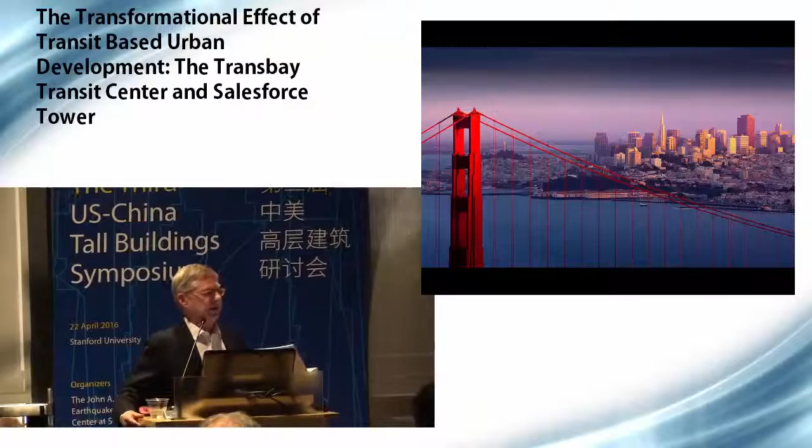I'm not going to talk so much about the Salesforce Tower today because there are several other speakers who are better prepared to go into detail of what it means to do a tall building. I'm also appreciative of how John Zhang organized this, beginning with the largest pictures and eventually focusing on the components that make a city. My talk won't be a great deal of detail, and I'm going to go really fast through the transit center itself, with mention of the Salesforce Tower. There's a lot to talk about.

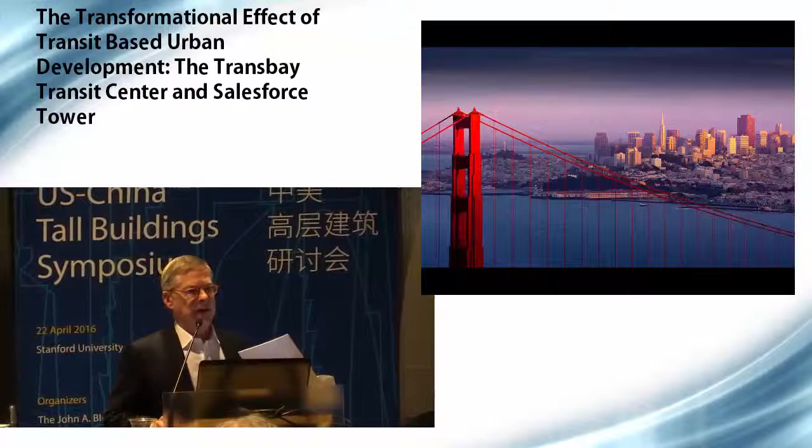Let me start with this particular slide. I believe strongly that there is an emerging, entirely new attitude toward tall buildings—much less about traditional assumptions of context and regionalism, much more about people and aspirations. This has broadened the assignment for those of us who design tall buildings; we're now obligated to include not just architecture, but urban design, engineering, the environment, culture, and lifestyle. I tried to think about how one might apply some rules for doing skyscrapers, not just in the United States but around the world, and how those rules might be universally applicable.

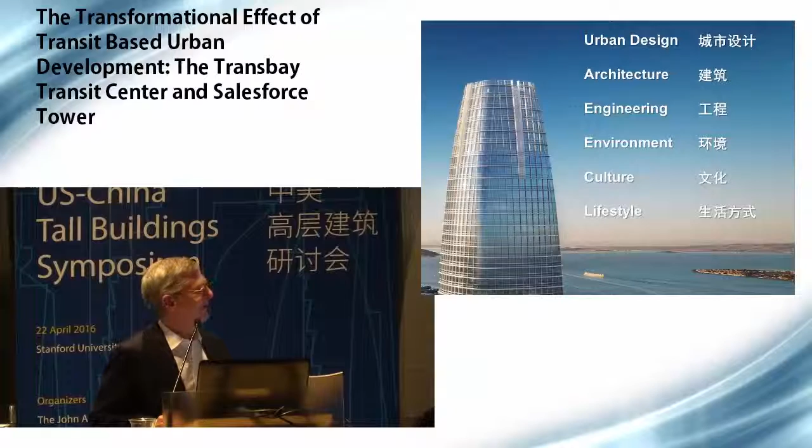Now, obviously this is my list. It would be wonderful to have this list argued against, expanded, or even eliminated, but this is where we're coming from—this is where Pelli Clarke Pelli is coming from, both in the Salesforce Tower and, frankly, in the transit center itself. John did a superb job setting the stage, so I'm not going to go into any real detail.

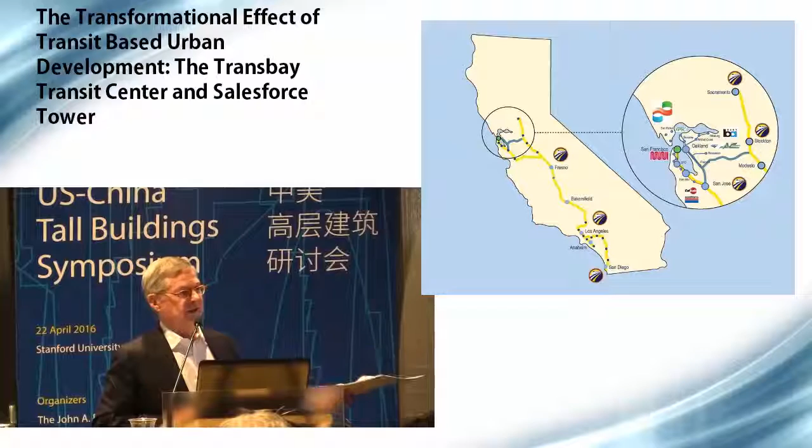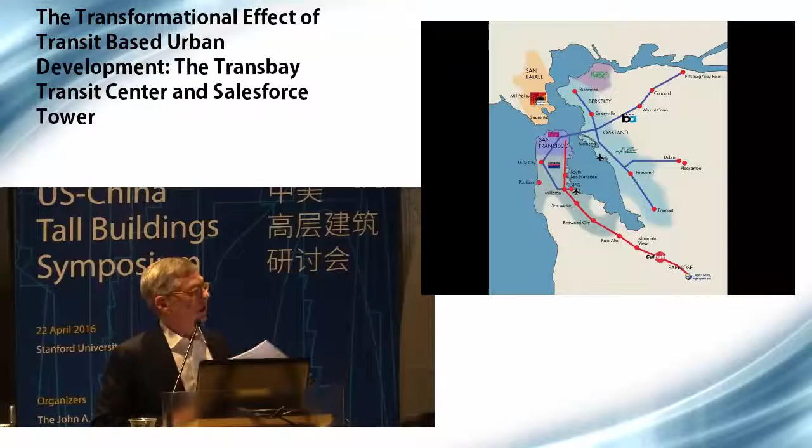Clearly, as you can see on the left, the ultimate objective is to connect the entire state of California from north to south via the California high-speed rail. The immediate objective of the transit center is to connect some 13 systems of buses, hopefully eventually Caltrain. The transit center itself is placed and designed to be the Grand Central Station of the west, meaning it's not only a functioning building but one of great symbolic importance. Those are the underlying objectives of what we did.

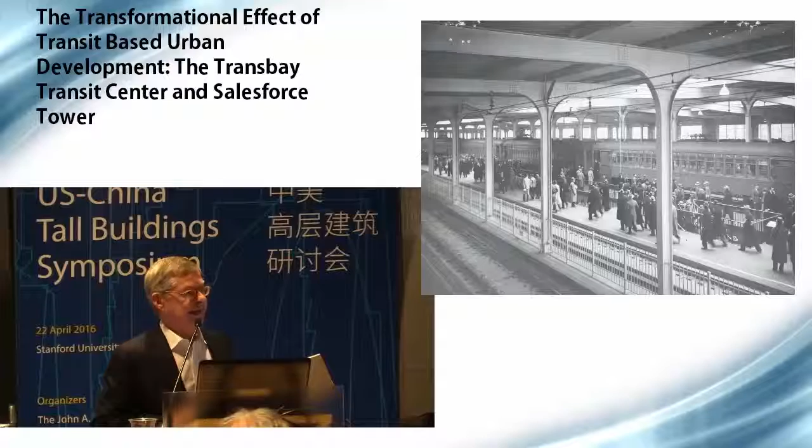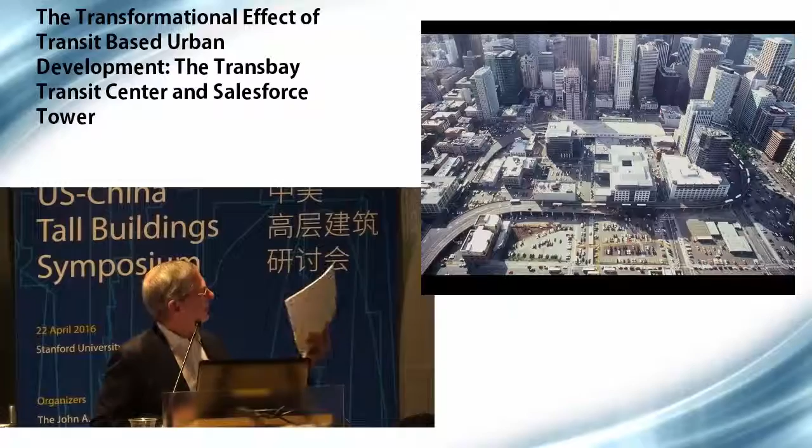The transit center has a long history. There was an interesting 1930s building before us, which in its prime was probably good, but eventually became, like many such buildings, unsafe, poorly maintained, and inappropriate for the times. What it did have was a very big footprint—around 5 acres—in the middle of one of the most important and hottest real estate markets, perhaps in the world right now. That footprint included several large ramps from the Bay Bridge that took buses through the city streets. So when you take down not only the transit center but the ramps, you unearth an enormous amount of buildable area.

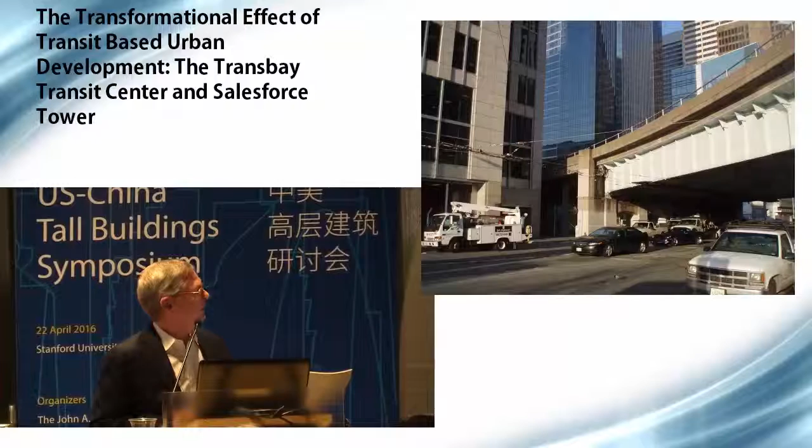This is an interesting slide—this is Beale Street as it was only about 10 years ago. If you walk on Beale Street today, you'll realize it's an entirely new and much better environment. This shows how critical those old bus ramps were to one's impressions of the city. Underneath that bus ramp today are some very important and valuable pieces of real estate.

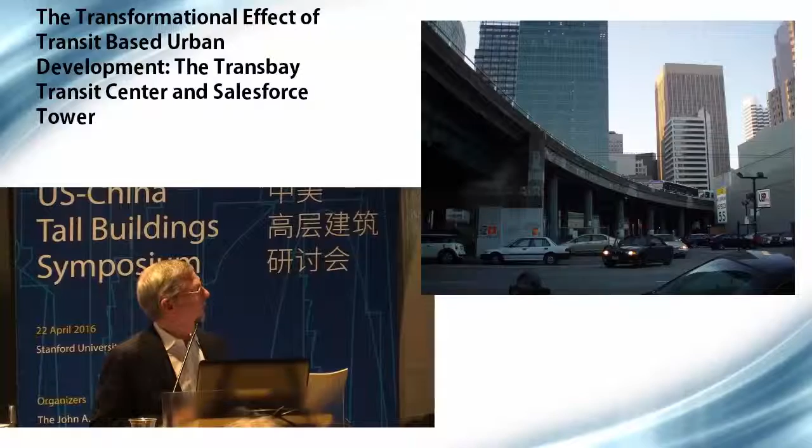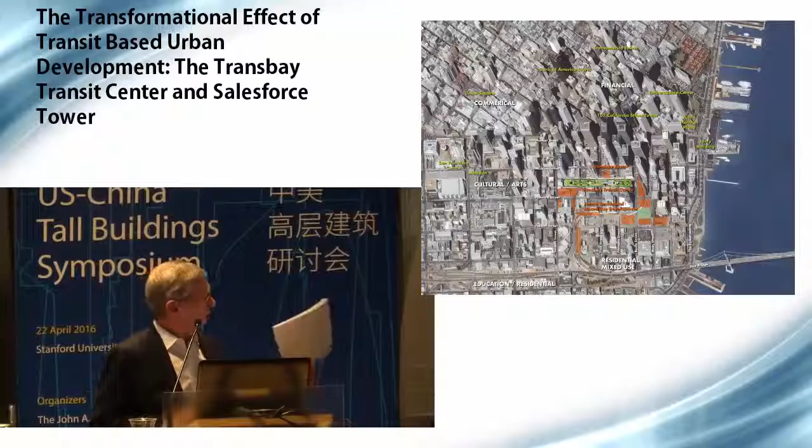The transit center is in the middle of one of the most important and varied parts of San Francisco's urban map. It happens to be at a confluence of cultural, arts, finance, recreation, and in the future, housing. This was a competition we entered and won some 8 years ago, and we realized this was the beginning of a new development—a new neighborhood of San Francisco.

Along with Peter Walker, our landscape architect, we did a great deal of research about the history of development in San Francisco, and there's a really interesting fact—I think San Franciscans are unique in this regard. In many instances, parks actually preceded development. A park was built first, and then buildings and communities were built around those parks.

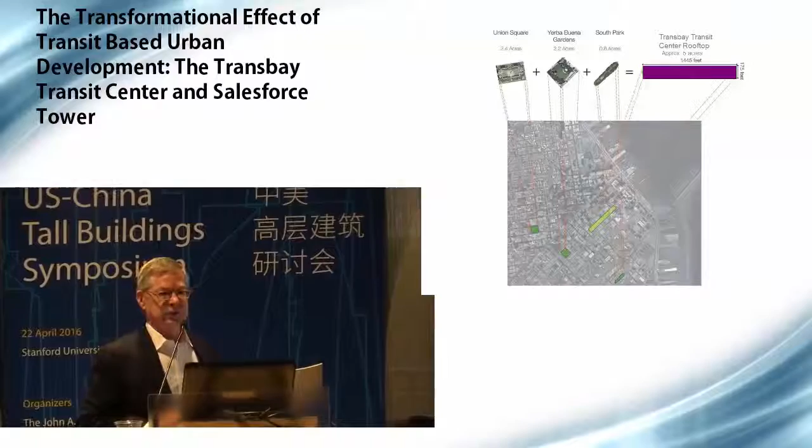We realized that the roof of the new transit center, a 5-acre roof, was going to be essentially the 5th facade of this building, since surrounding towers were most likely going to look down on this roof, and they had to be able to see something. Our attitude and approach was to make that an urban amenity, and thus was born the notion of a 5.5-acre, fully accessible, fully usable urban park.

Obviously this goes well beyond just the notion of the green roof. For the architects in the room, in the middle of the competition, we did a quick analysis to see if this was more or less expensive than a fancy glass roof, like one sees in transit centers. It turned out this park, on a per square foot basis, is half the price of doing a fancy glass roof. And of course you can't occupy a fancy glass roof. You can look down on it, it's probably handsome, but it's expensive and it's really not a public gesture ultimately.

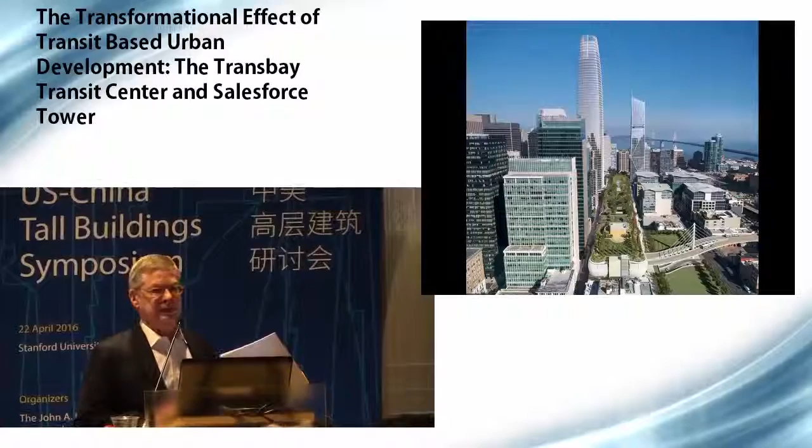We also went to a lot of pain and analysis to see how this building might be the very best neighbor it could be at the street level, and to its adjacent, as yet unpredictable buildings.

So we spent a good bit of time on the skin of the building. As many of you know, if anybody's been to the Port Authority bus terminal in Manhattan, bus stations and transit centers are usually really terrible neighbors. They actually kill development rather than create it, and we wanted to absolutely reverse that trend. Now New York is thinking in these terms—we're now involved in the analysis of the Port Authority bus terminal in New York, and Transbay has become the model for that kind of development there and in other cities where we've given this talk.

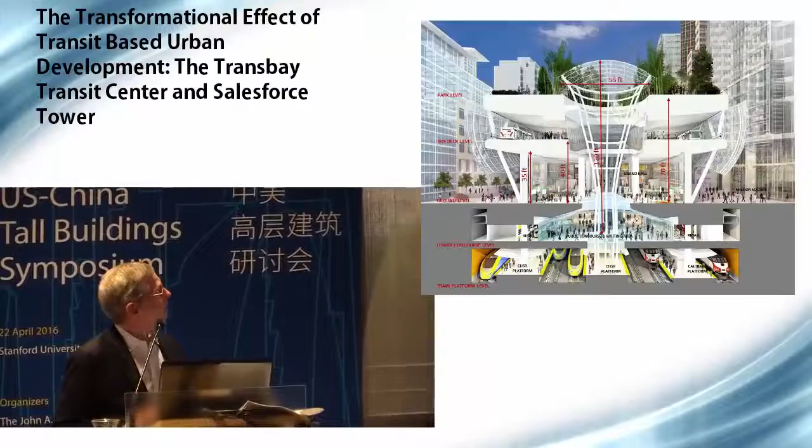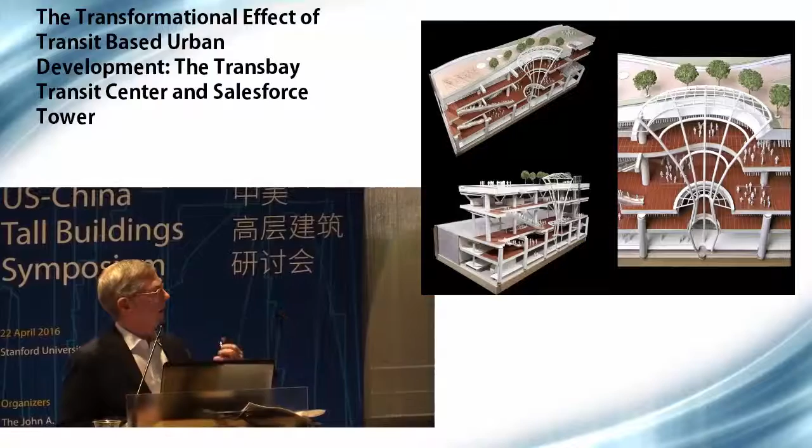This was a building that was enormously studied, both in traditional three-dimensional ways and more contemporary ones. But ultimately, as big as it is, the architecture boils down to three essential ingredients: the park, the large public space I'll show you in a few minutes, and the skin that wraps the entire building. Otherwise, this is a giant feat of engineering. I make that point because, once again, this building is an example of the confluence of architecture, culture, and engineering in a very interesting way.

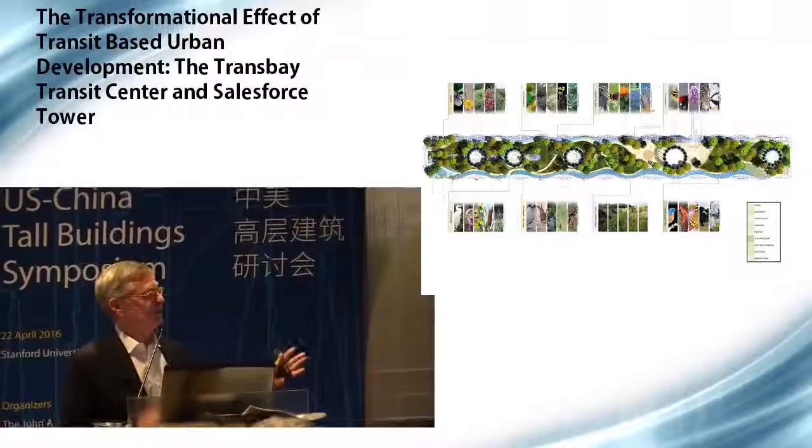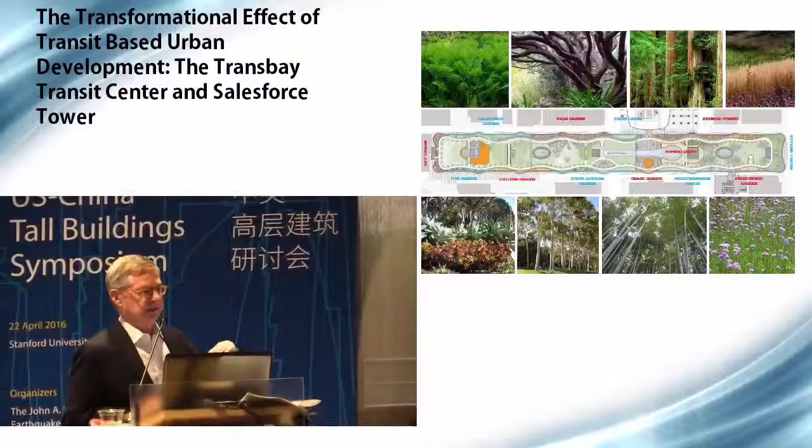The park itself is highly varied, with many sub-environments within it. I won't go into a lot of detail, but suffice it to say you'll be able to visit this park every day of the week and see something new.

The building is also highly sustainable. We decided early on that simply being a LEED rated building—although we are LEED Gold—was really not enough of a statement, not enough of an aspiration for our project.

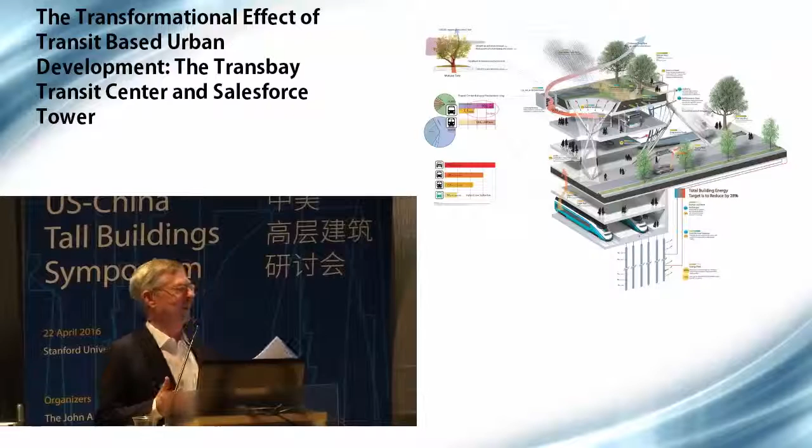With the park, we've introduced a whole new set of things we were able to achieve. Let me rattle off some statistics. Beneath the entire building is the largest geothermal installation in the United States, perhaps one of the largest in the world. The geothermal installation alone has allowed us to completely eliminate cooling towers. If anybody knows what a cooling tower looks like, you know you really don't want to look down on one from your apartment next to the transit center.

The water management system within the building, which is really the core idea behind the park, allows us to manage 10 million gallons of water a year. Rainwater management in San Francisco is a huge thing.

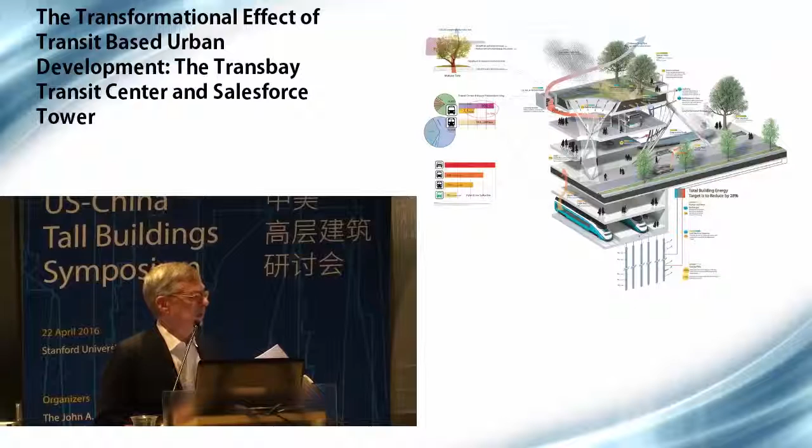10 million gallons of water, or 144 Olympic-sized swimming pools, is what we're taking care of every single year. The trees in the park will capture 12 tons of carbon. It's a huge carbon sink.

It's the place that you really want to have in the middle of a high-density, very active transit-based development. The carbon emissions control in this building is such that, in many ways, it's as if you're planting 2 new acres of trees every single year the building is in existence. So the building is designed to give back to the environment, not just to manage it, but to give back in some extraordinary ways.

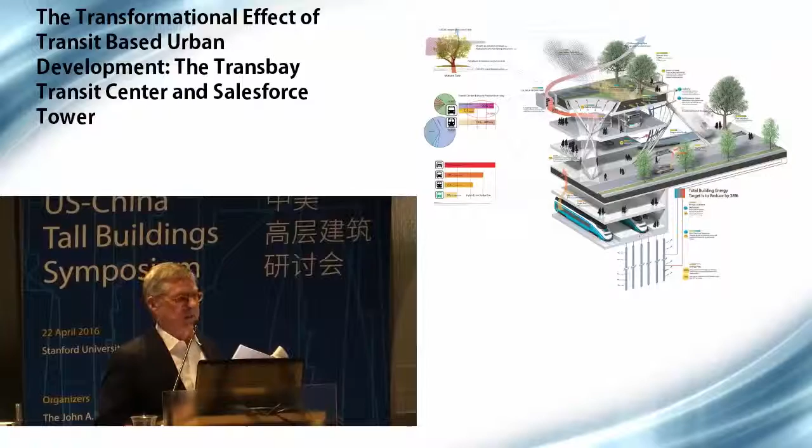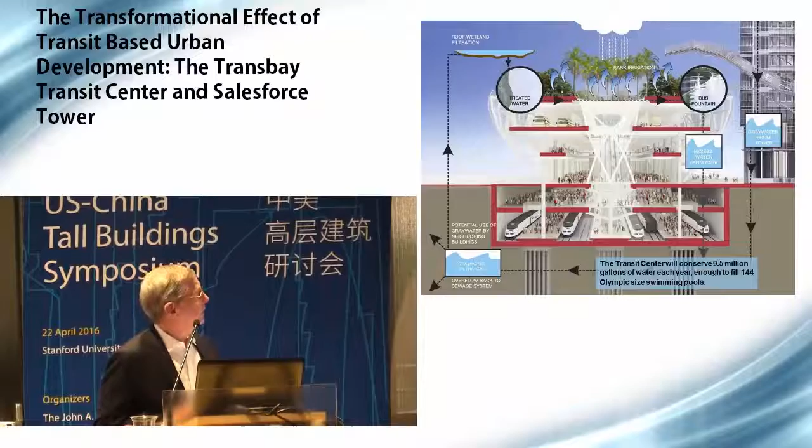It's naturally ventilated. As I said earlier, the water management system and energy management system alone are very, very critical. I'll quickly go through the plans.

The intention, which ties into some of the things John said earlier, is that this building touches the ground very lightly. It's highly permeable, so you're able to drive and walk all through it, with safe transits under the building. Every street, every alley, such as Shaw Alley, will go through the building.

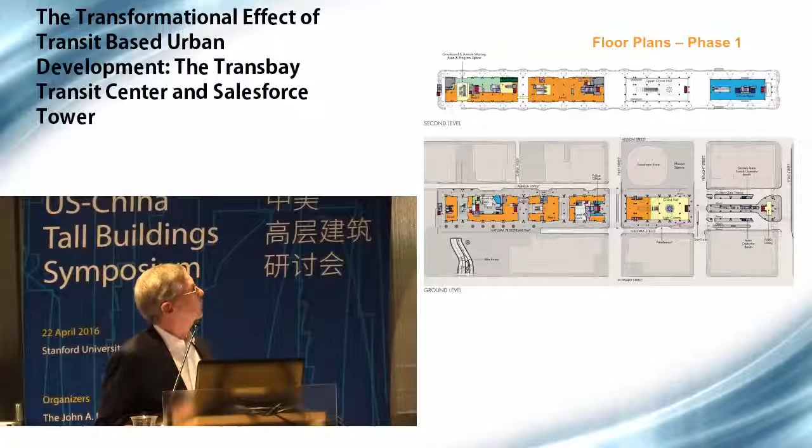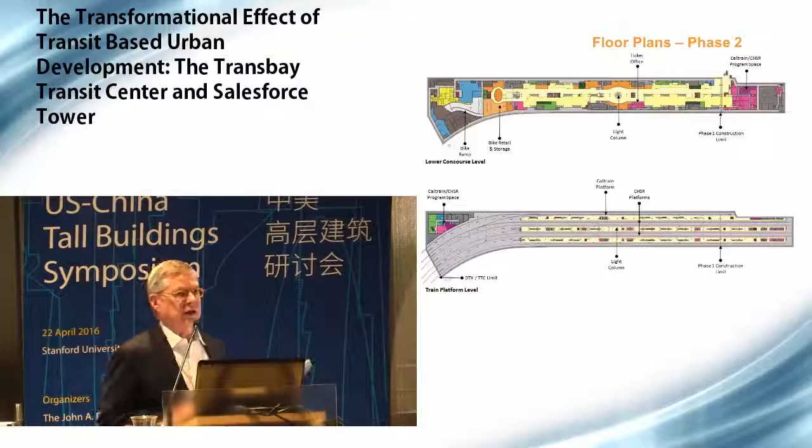The lower level, the retail level at the street, is highly programmed with local retail opportunities. There's a second floor of retail, the park on the very top, and the bus deck just below the park. As you go below grade, the top drawing is the concourse level where you wait for your trains, and beneath that is the train deck itself.

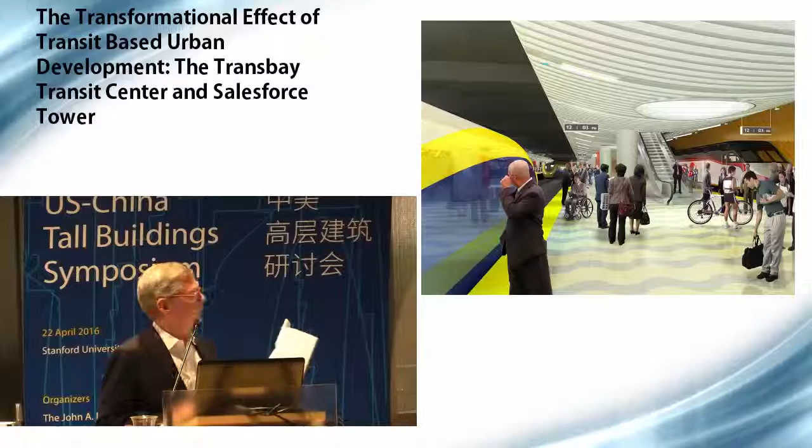This is phase 2. This is the concourse level where you wait for trains, and the trains below that. We've managed to bring natural light all the way through the building from the park down into the train level. Let's see if this works.

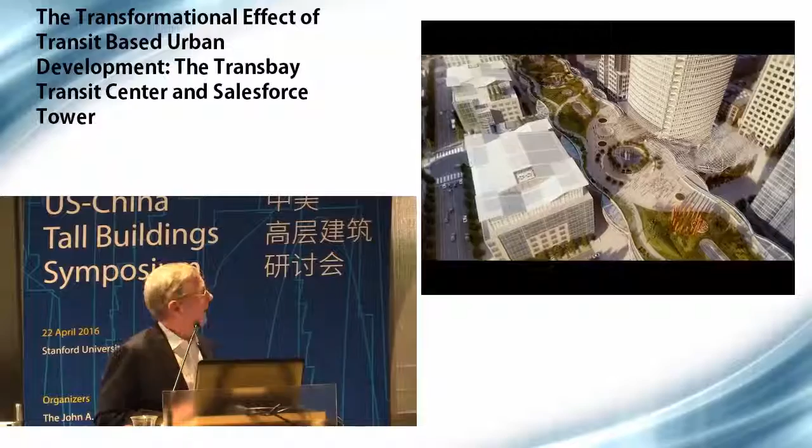This is one of the best ways to understand it. This is an older animation, slightly out of date, but it will give you a sense of the scope and attitude toward the development.

As you can see, this whole notion of a fifth facade becomes really critical because every new building is going to look down onto the park.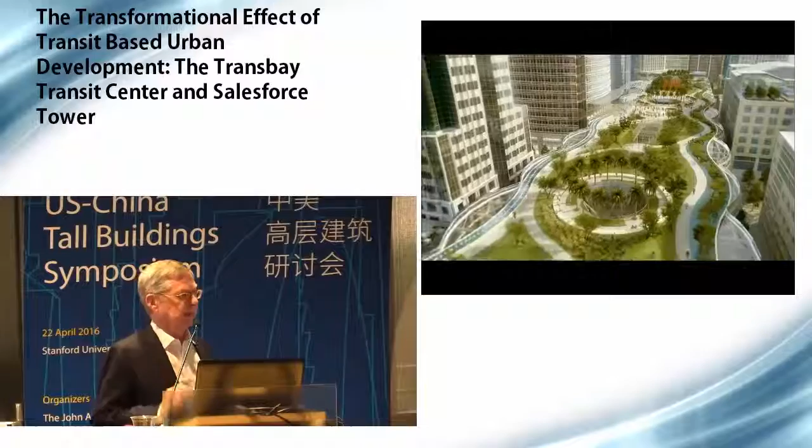Peter Walker has been a superb partner in all of this. He's designed a really amazing place, full of experiences and details. The park itself is considered a kind of educational opportunity as well. If you want to learn about landscape, this is one of the best laboratories for dealing with everything from wetlands to desert climates. Peter has had a way of weaving all of those attitudes together.

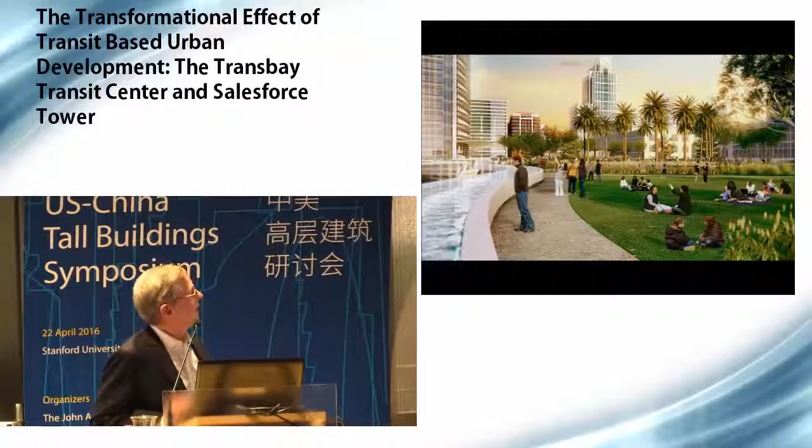The park itself is also a place for art. The fountain you just saw is operated by bus movement.

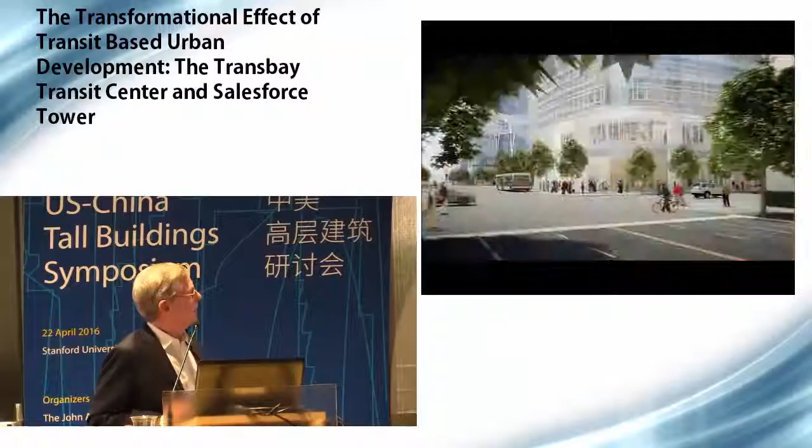At the street level, again, very transparent, friendly, and open. This is on Mission Street. You see the Salesforce Tower on the right. Salesforce Tower itself also meets the ground in a very light, transparent, and open way.

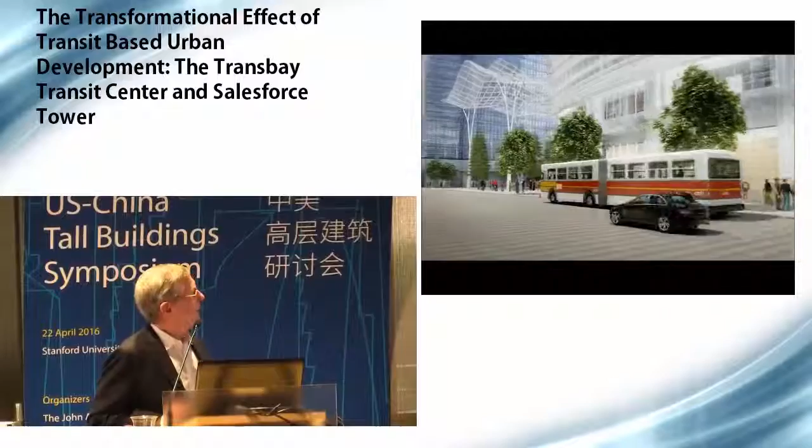During the days of the competition, we had a roof over what we're calling Mission Square, a large open space that fronts onto Mission. That roof has disappeared. The grove of redwoods, I think, is still there, although it's being discussed with Salesforce.

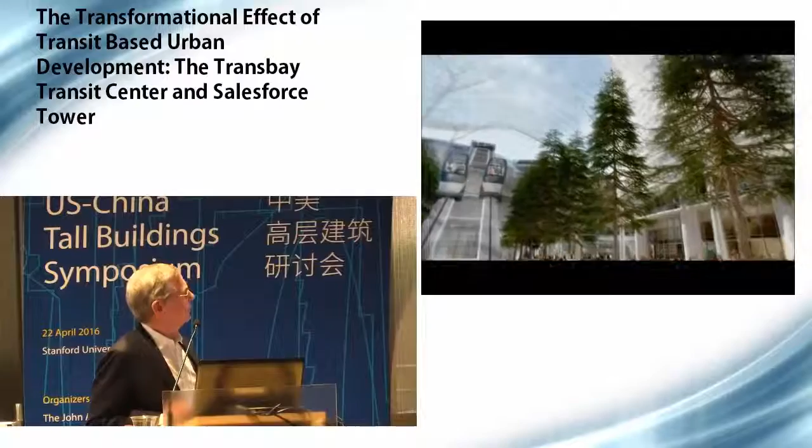Within that grove of redwoods is a funicular, which John mentioned, that will take you from Mission Square up to the park level itself, through the redwoods.

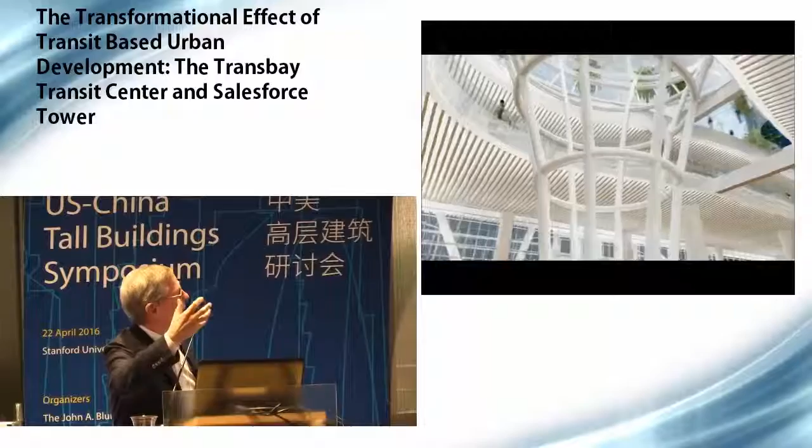Inside the building, this is what we're calling the Grand Hall. The centerpiece is a column of light that is both a structural device and a way of bringing light, literally daylight, from the park level all the way down into the concourse below.

At the bus level, if any of you remember the old transit center, it was dark and gloomy. This bus level is very bright, very open, very safe. Wayfinding is clear. Now you're down at the train level.

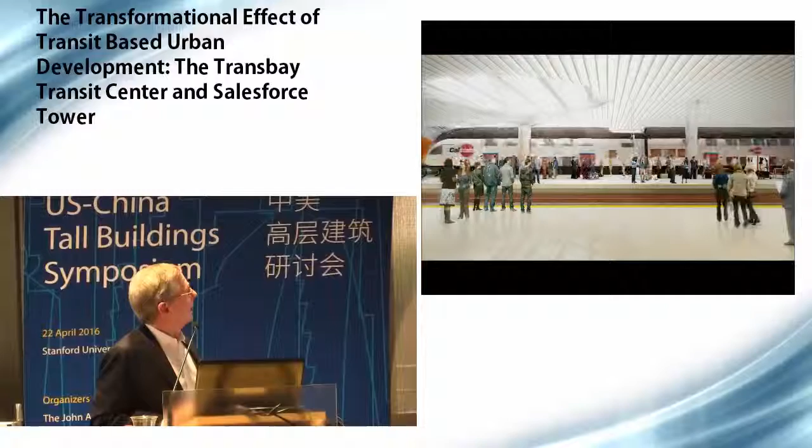Once again, we're bringing natural light deeply into the train level. It's roomy, very well organized, very clear, and very importantly, quite safe. A great place to meet your friends.

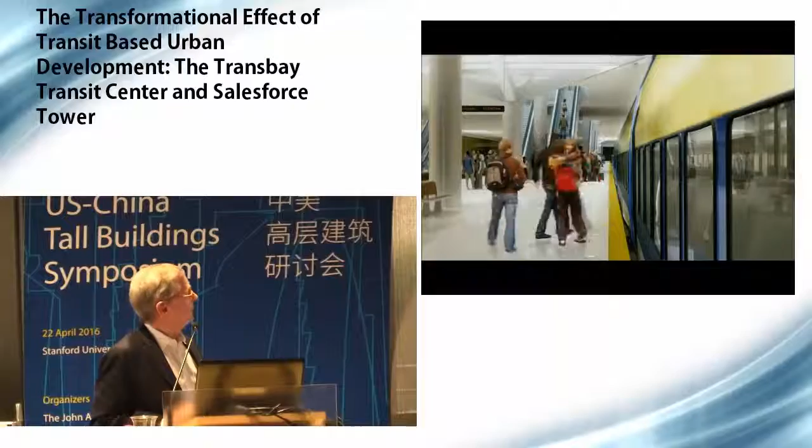I think they're friends, I'm not sure.

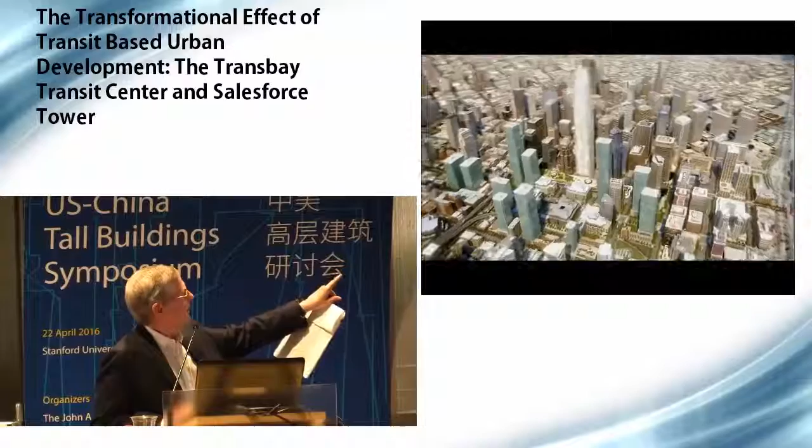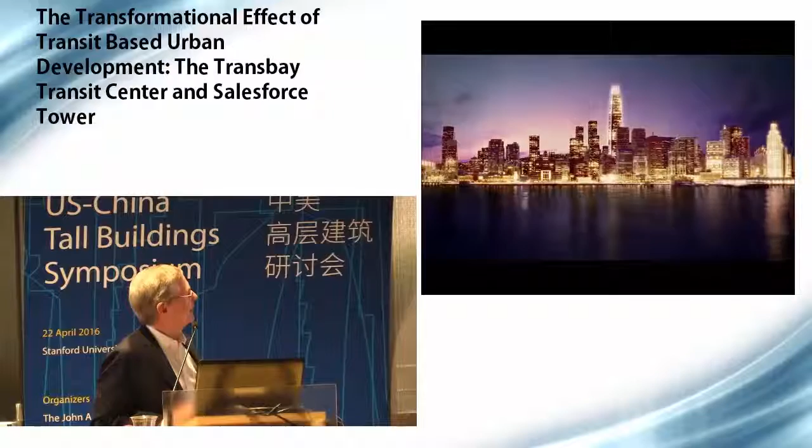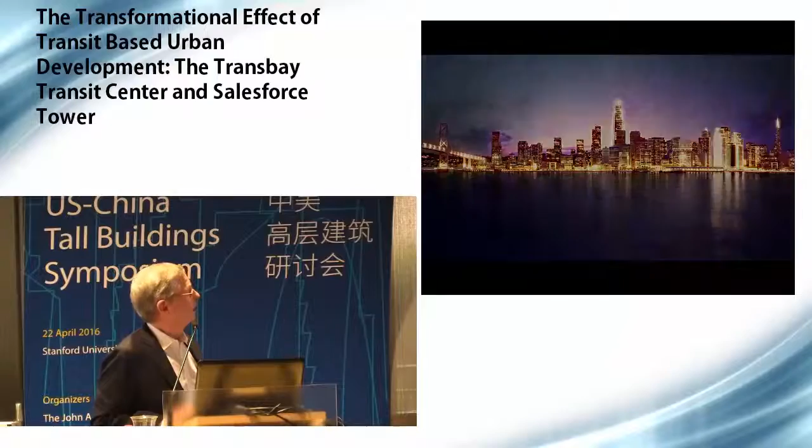This is an interesting slide because every one of the gray-green prismatic buildings you see there is a new development site made available by the removal of the ramps and the associated parts of the transit center. And of course, it all culminates in the Salesforce Tower. As John mentioned, the height of the Salesforce Tower is protected, and we hope it will be, for a very long time if not forever, the tallest building in town.

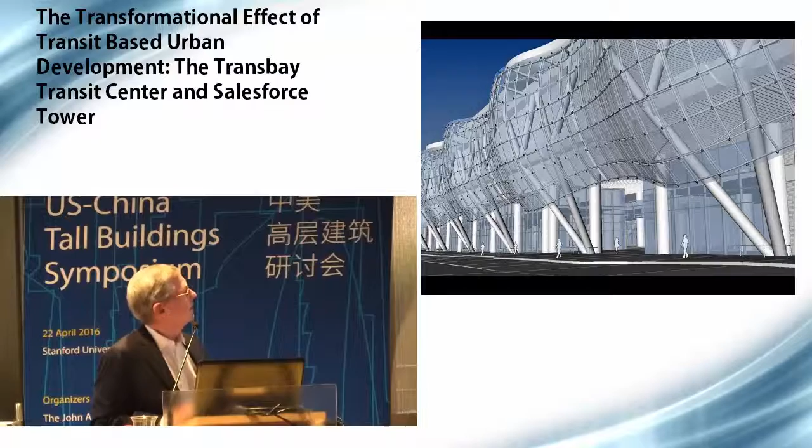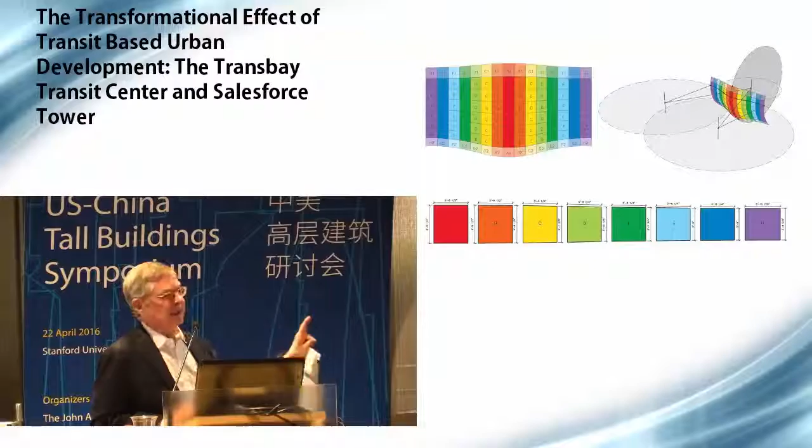The transit center is wrapped in a perforated metal skin, but underneath that metal skin is a complex bridge-like structure of primary and secondary structural elements that undulate and wave. They're curved both in plan and section. Being curved in plan and section means that every piece of cladding is actually a slightly different trapezoidal shape.

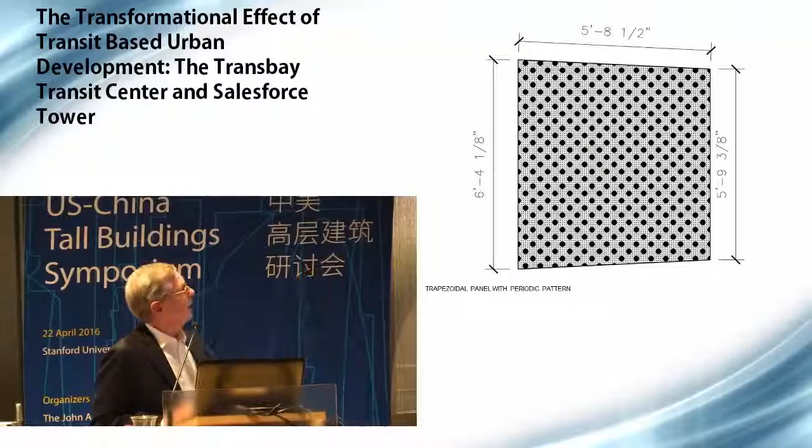This skin needed to be perforated also because we wanted it to be naturally ventilated. When you perforate a trapezoidal shape in a more normal way, you get very ragged edges. And we realized we needed another attitude about the perforation that was not just the more orthodox gridded kind of pattern. So we looked to a person who's now become a very good friend of ours.

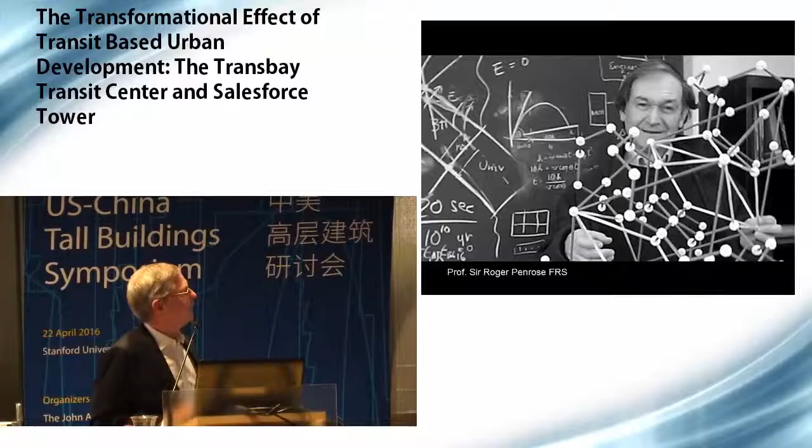The mathematical physicist Sir Roger Penrose. If anybody's seen The Theory of Everything, he's in there. He was Stephen Hawking's thesis advisor at Cambridge. One of Dr. Penrose's hobbies is what he calls creating tiling patterns. For a mathematician, a tiling pattern is simply a way to describe a surface, in this particular instance, in what he called an aperiodic way. This is a non-repeating pattern.

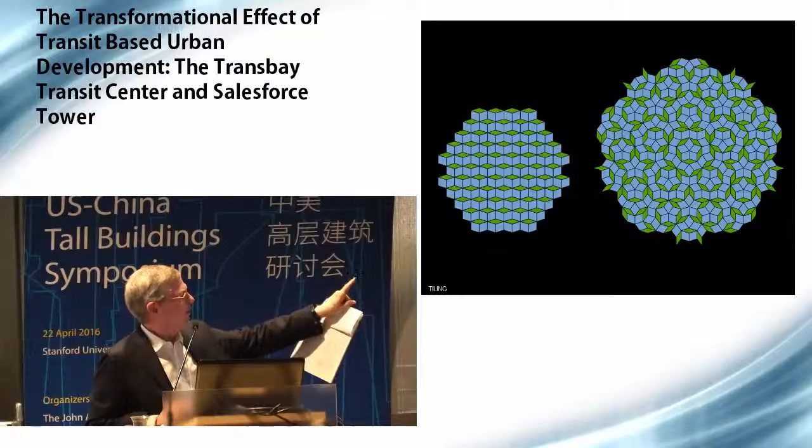The one we're using is the one on the right. It may look like there's a module to it, but there really is not. It looks like it's repeating, but if you look carefully, it's actually not. It's made of two rhombuses, a large one and a small one, which kind of flower and unfold across the pattern. The nice thing is that it was eventually discovered this is the atomic structure of aluminum, which is what our wall is made of.

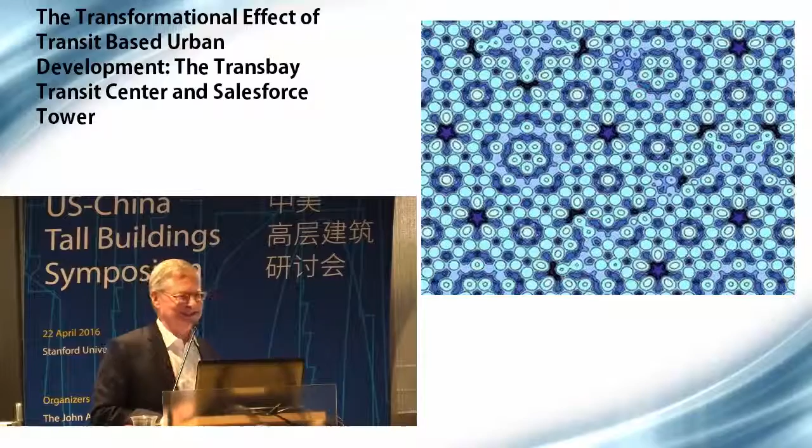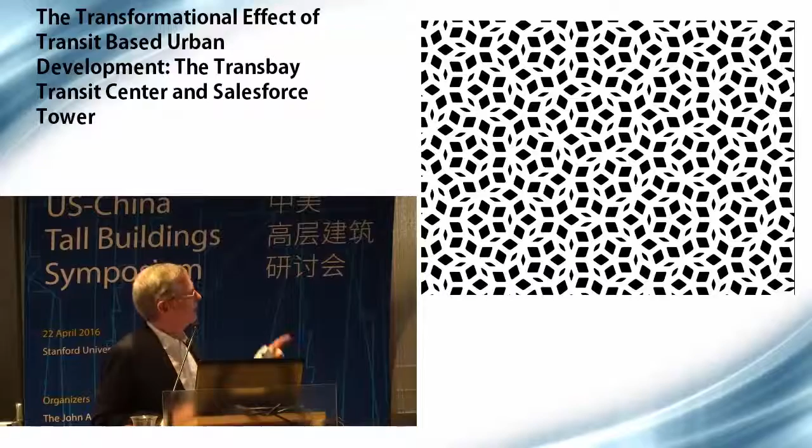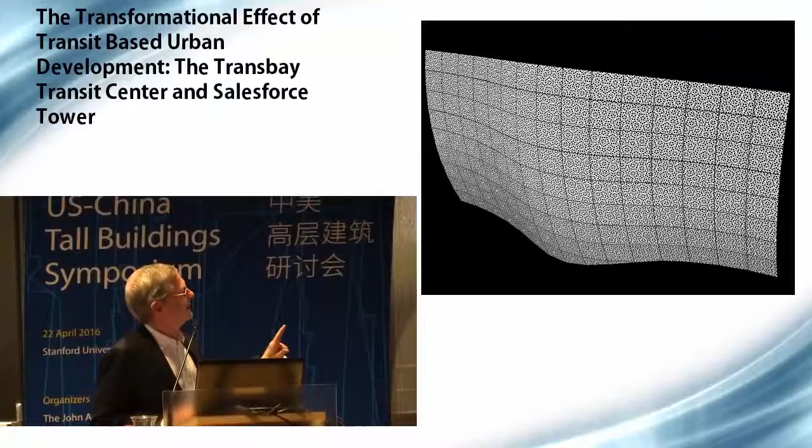Now, this is just pure coincidence, but it's great cocktail party stuff. If you apply Penrose's pattern to our trapezoidal shapes, all of a sudden your eye is led to the pattern and less so to the edges. And that pattern, after an enormous amount of brute force computer work, has now been stretched through the entire building seamlessly. The hardest thing to do was to get the pattern to jump the gap from panel to panel, and I promise you it does.

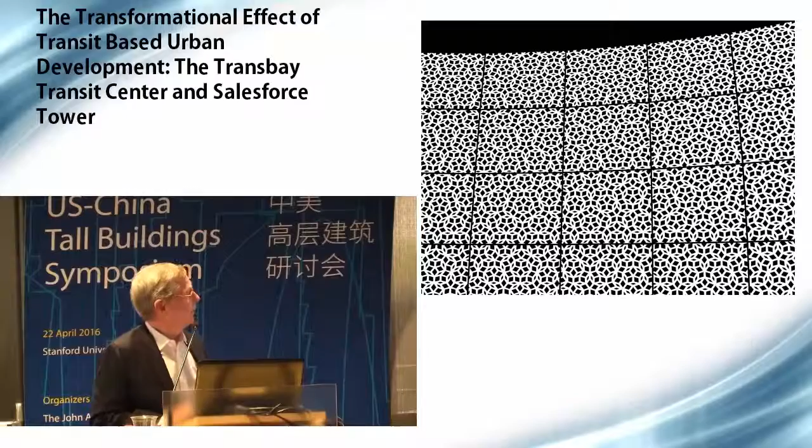Penrose and his wife, who's really vigilant about his ideas, have both looked at this many, many times. We've redone it many times, and finally he's approved it. And it's going to be quite spectacular.

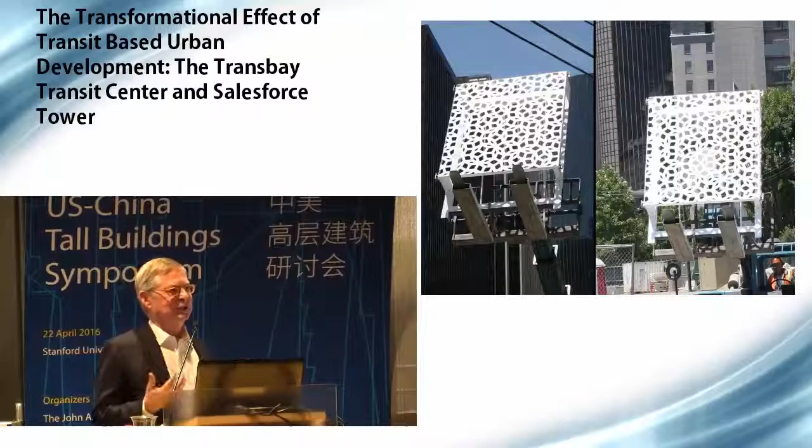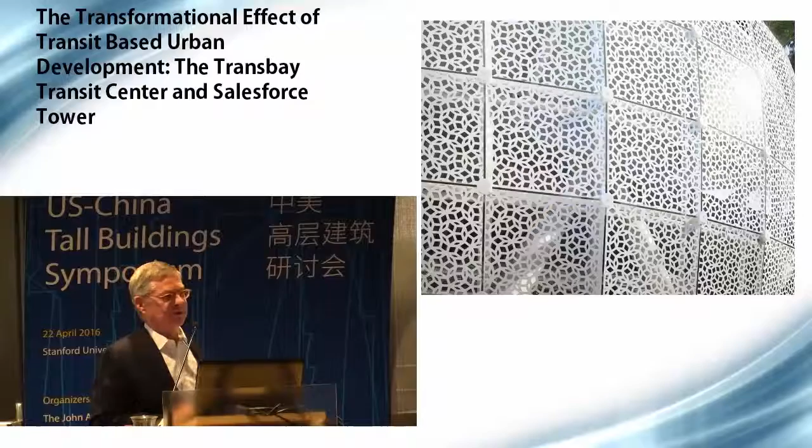The cool thing about this, in my mind, is that this is very much about the Bay Area, because this skin is itself symbolic of the confluence of art, culture, mathematics, and science. You can actually stand outside this building and talk about mathematics, or talk about the history of science. There are not very many skins on buildings that you're able to do that with. Plus, this light, lacy structure is really just extremely handsome.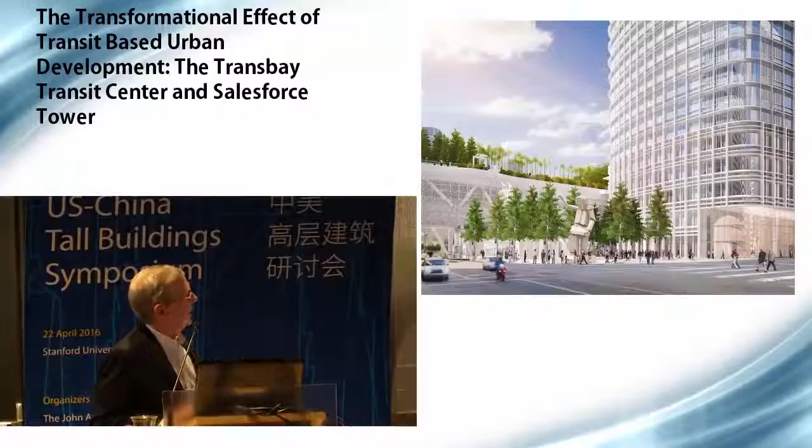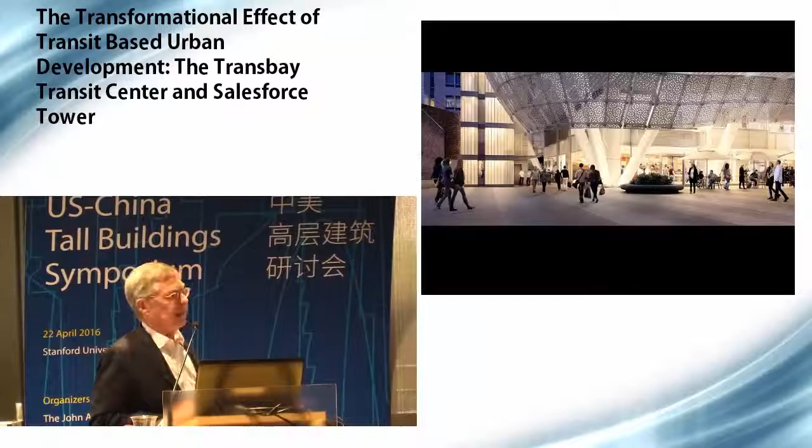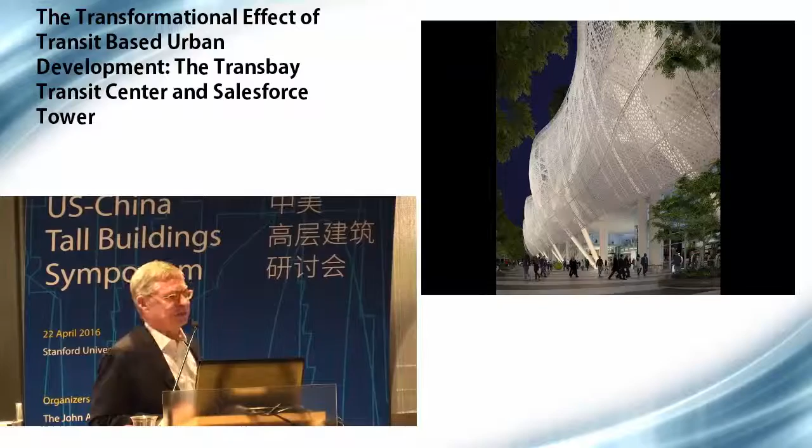Here you see it behind the Salesforce Tower, crossing First Street. It meets the ground very lightly, stopping about 20 feet above sidewalk level. In the evening, we're lighting the structure from behind so that the lace itself is in shadow, lending, we think, an extraordinarily sexy, dramatic image — if you could call a transit center sexy, I think then you've accomplished a lot. And it's now under construction.

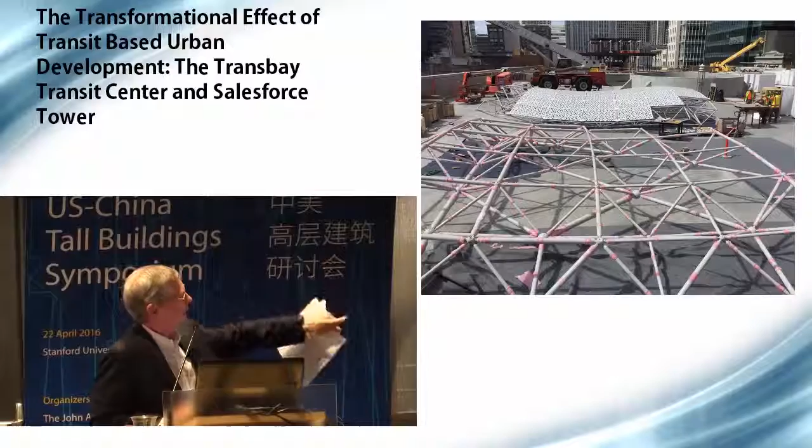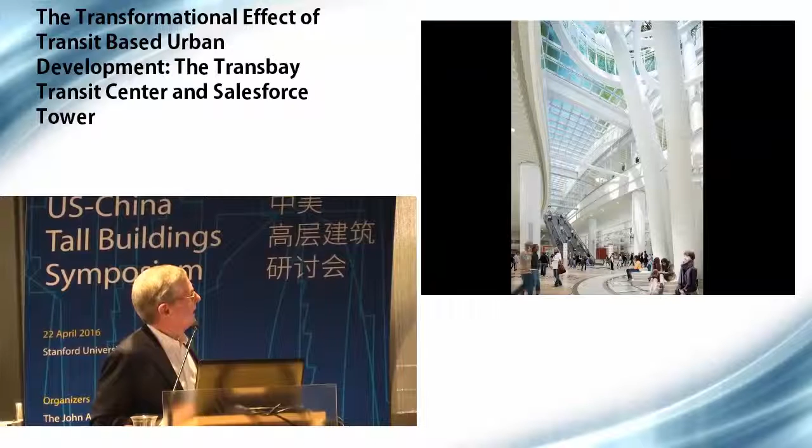This is the roof of the transit center where we're assembling the panels. The substructure, which is a space frame, gets the panels, and then they're lowered over the side of the building and bolted in place. Inside the building is the Grand Hall, a space that connects all the way from the street level to the park, very full of sunlight and full of public art.

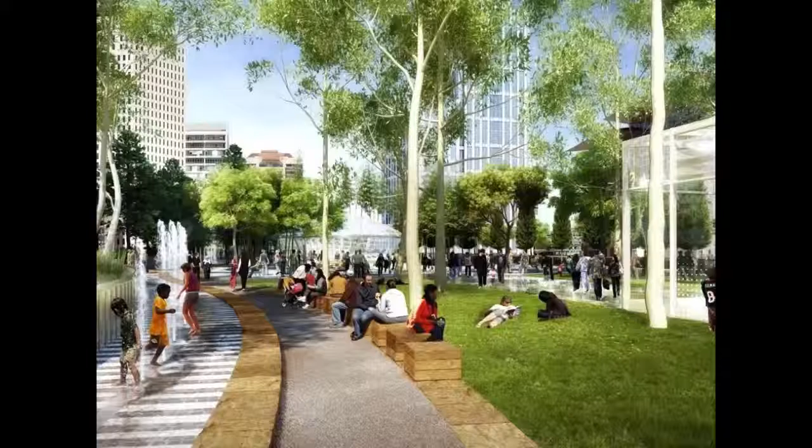And then the park itself, as I mentioned earlier, is very green. It's really a park, not just simply a green roof, with eating and entertainment opportunities. A fountain that runs almost the full length of the park is activated by the movement of buses through the bus deck. This is a fountain designed by a very popular San Francisco artist, Ned Kahn.

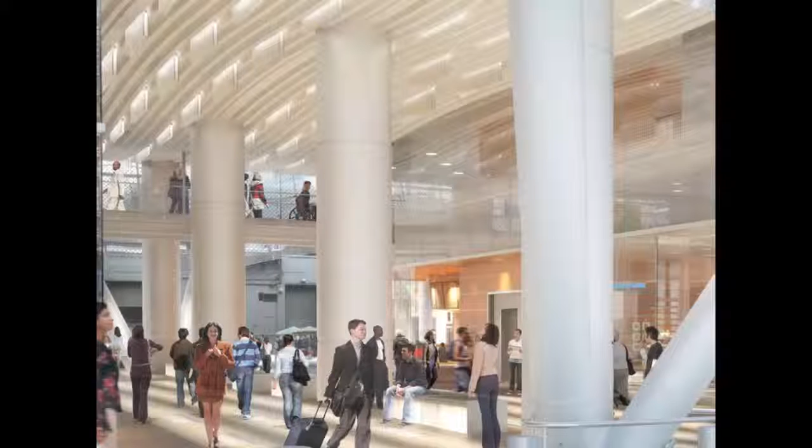Probably many of you in the room know Ned and have worked with him — one of the most brilliant people I've ever had the luxury to collaborate with. Jamie Carpenter from New York is designing the ceiling that allows us to connect through with Shaw Alley. From Mission Street, Julie Chang is doing the floor piece.

Very extraordinarily beautiful composition of terrazzo with an enormous amount of detail. Julie has a whole narrative, and again, this is another one of those parts of it. This is a very, very large building.

We're working with Jenny Holzer to do a large piece on the wall of the Grand Hall itself, which you see there. This gives you a sense of the scale of the Julie Chang floor piece. We use our clients as scale figures in this animation.

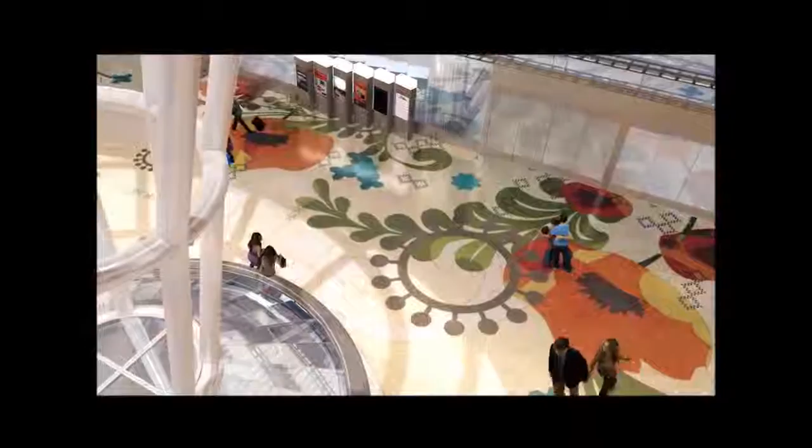But these are real views. These are views that you will have as you move up and down from the bus deck, from the park. So you can see how appropriately scaled and brightly colored Julie's piece is to make a truly memorable, important, contemporary sense of place.

The Jenny Holzer pieces are viewable from both the bus deck side and the Grand Hall side. And if you're familiar with Jenny Holzer's work, it's text-based. She's done a lot of research about the writers of the San Francisco Bay Area.

This is Ned Kahn's bus fountain, which indeed we're inviting kids to play in, or adults for that matter. I think it's going to be very, very popular.

This is Jamie Carpenter's Shaw Alley underpass. Again, giving it a good sense of just the permeability and friendliness and charm at the street level.

The tower itself is 1,070 feet in height, 1,300,000 square feet in area. It connects by bridge to the Transit Center Park. It's the first of 3 buildings that connect by bridge.

It's also the center of what is becoming Salesforce's campus in San Francisco. SOM has designed a very beautiful building diagonally across the street from us, which is the Salesforce building.

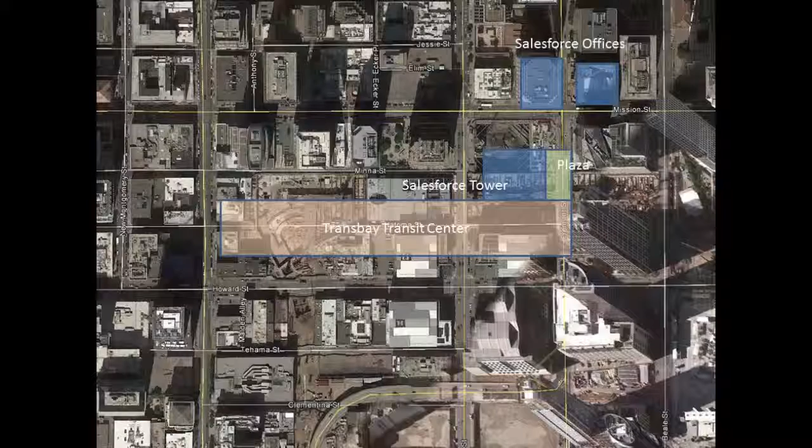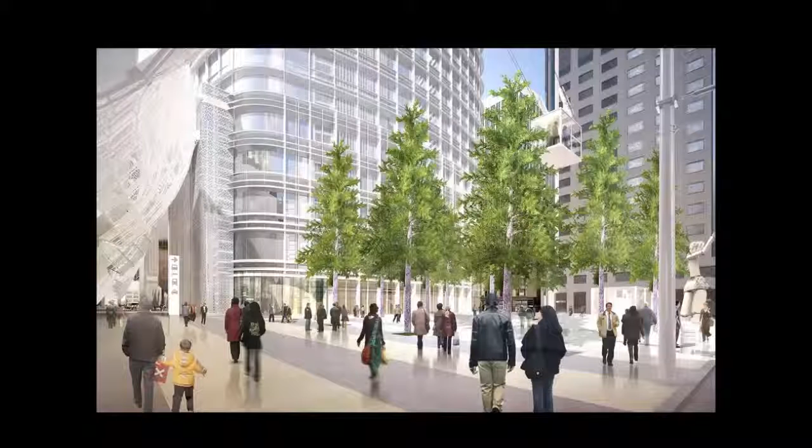They're now in 50 Fremont and many other buildings in the neighborhood. And Mission Square, which is the open space that you see on the right, has really essentially become the campus green for Salesforce, including the redwoods, which we hope will last. There's some question about them being perhaps too dense, but we're still looking at that really carefully.

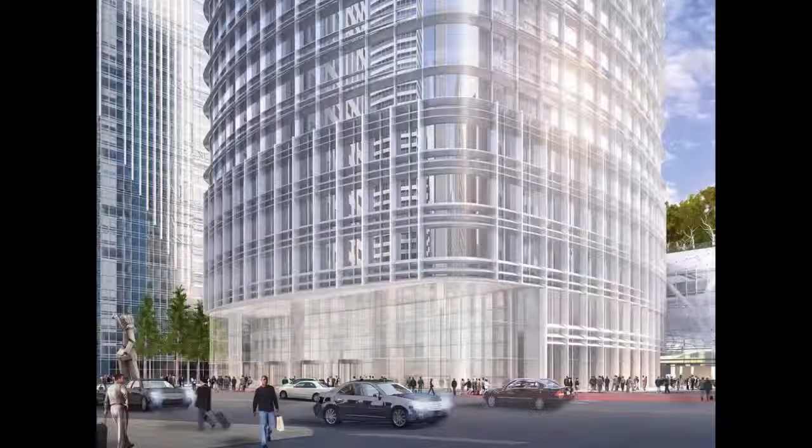And once again, we worked really, really closely with John's group of people, particularly Josh Switzky. I consider, actually, this is a project of many, many parents. And John and his team are very much our collaborators.

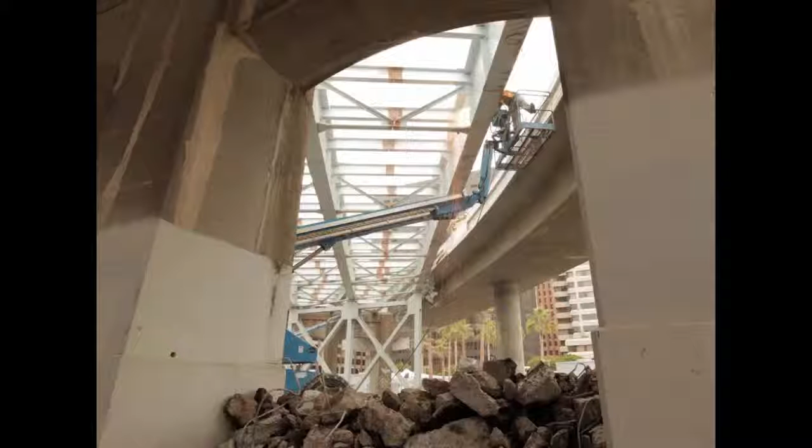I could probably spend 30 minutes pointing to the refinements in the project that came from our work with John and his group. One other piece of art, done by the LA artist Tim Hawkinson, is somewhat controversial and made of the rubble that came from tearing down the ramps. So Tim very carefully chose about 20 pieces of rubble to make a sculpture.

Now, my friend John King has nicknamed this Barney rubble. I don't know if that's intended to be complimentary or not, John, but I'll take it as a compliment.

Tim Hawkinson's idea is that if you're familiar with the Inuit culture, the Inuits stack rocks in the middle of these great broad plains in the Arctic, where you have no other way of knowing where you are or where you're going. The rocks are usually turned to point you in a direction, pointing you north, pointing you toward shelter. Tim's idea was to take the rubble, which is essentially the rock of this neighborhood, and create a sculpture which points toward the future.

So, again, this is controversial. It's obviously aesthetically very much unlike anything else around it, which personally I like a lot. But we'll have to see if it really is going to last over time. I hope it does. And it's placed right on the corner of Mission and Fremont.

The tower itself is insulated, curved glass corners, sunshades that vary in depth depending on the orientation of the building. The top is transparent in terms of its effect on shadow and sun, but at the same time has the obligation to mark itself very, very clearly on the skyline.